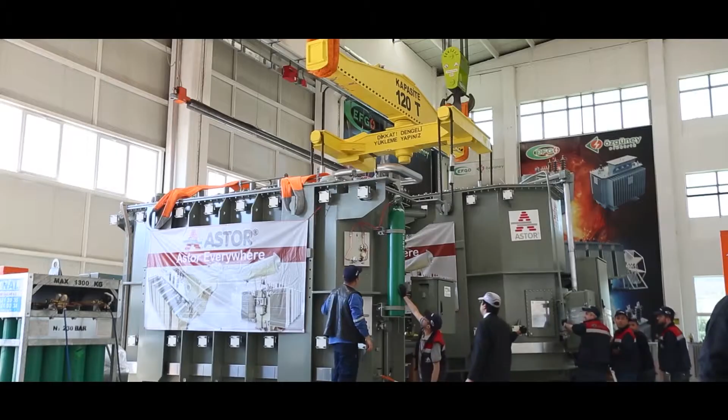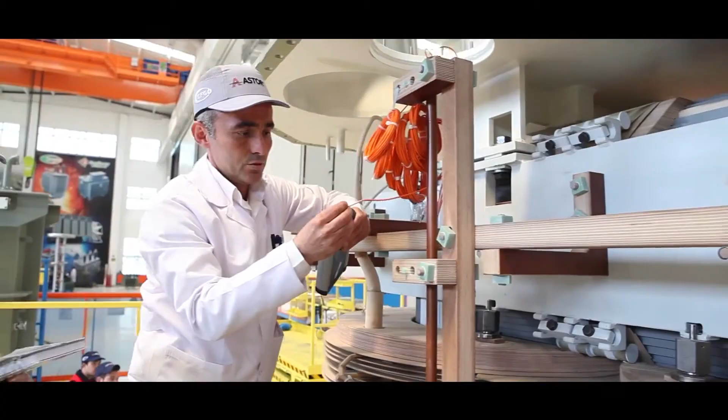The company manufactures cast resin dry-type and oil-type distribution transformers, as well as power transformers up to 220 kilovolts, 150 megavolt ampere at its factory. This facility boasts a closed area of 26,000 square meters, established on a 36,000 square meter surface at the Ankara-Sincan First Organized Industrial Zone. Our customer satisfaction-oriented company takes quality as our primary target for both manufacturing and service.

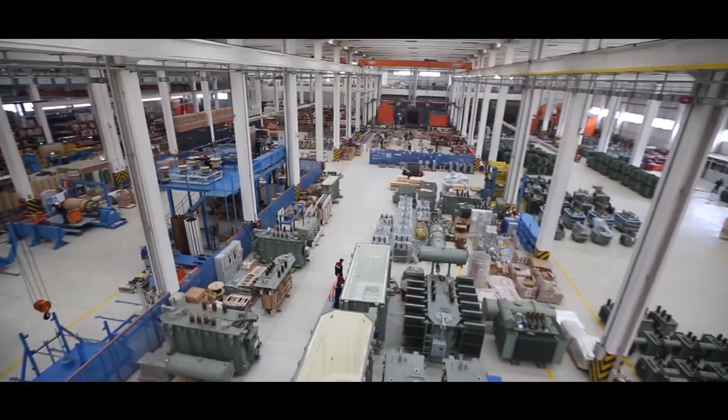All of the manufacturing processes in accordance with the aforementioned target are meticulously checked at every turn by our experienced and competent quality control staff. Our company is in possession of many management systems such as TS EN ISO 9001, TS EN ISO 14001, TS EN ISO 17025, and OHSAS 18001. The completion of manufacturing is ensured in accordance with the related project and the quality management systems.

Related non-conformities are eliminated with the implementation of corrective and preventative actions. All processes are recorded and tracked. Kaizen studies are conducted for the processes that require one by analyzing its accumulated data. Astor AG, with a monthly production capacity of 2,000 distribution transformers, boasts Turkey's largest capacity and ranks within the top 5 companies of the world in its field.

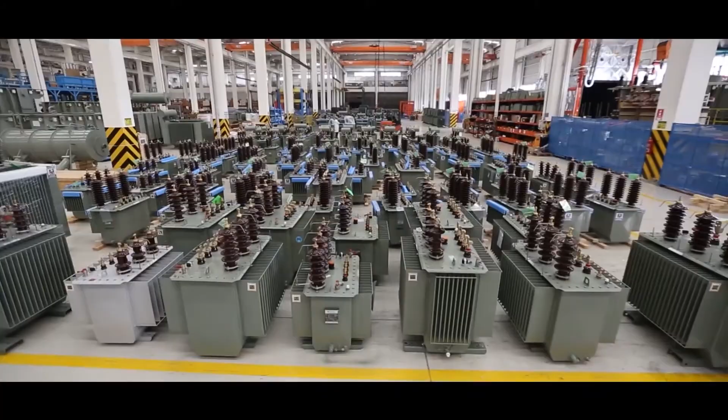At our facilities, we manufacture cost-efficient, safe, low-loss, long-lasting oil-type transformers with a power range of 250 to 2,500 kilovolt ampere and up to 36 kilovolt voltage levels, as well as custom-type transformers per customer demand, bearing the brand of Astor and EFG. Power transformers up to 220 kilovolts and 150 megavolt ampere, bearing the brand of Astor.

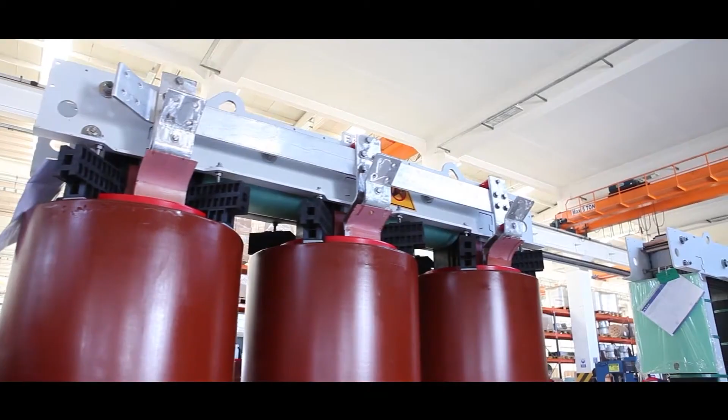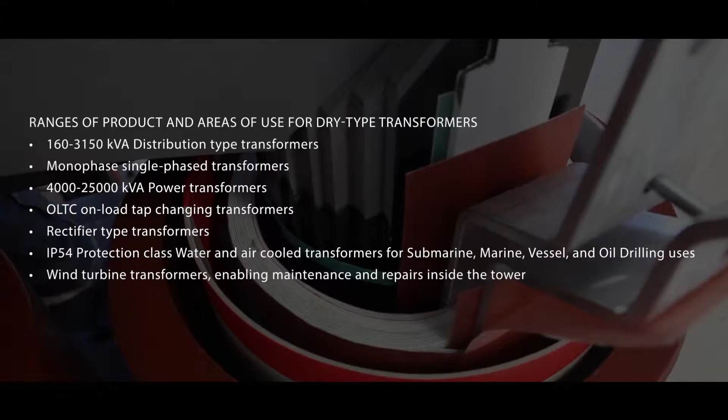Cast resin dry-type distribution transformers at the quality standard of ISO 9001 with a power range of 160 to 3,150 kilovolt ampere, up to 36 kilovolt voltage levels with natural air-cooled or fan-cooled options, bearing the brand of EFG. Ranges of product and areas of use for dry-type transformers are given below: 160 to 3,150 kilovolt ampere distribution-type transformers, monophase transformers, 4,000 to 25,000 kilovolt ampere power transformers, OLTC on-load tap-changing transformers, rectifier-type transformers, IP54 protection class, water and

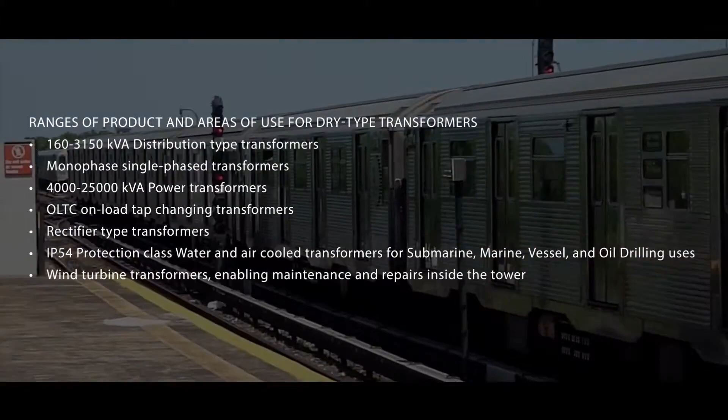air-cooled transformers for submarines, marine vessels and oil drilling uses, wind turbine transformers enabling maintenance and repair inside the tower. Minimizes the risk of burning and explosion at locations with a high density of human habitation, such as subways, tunnels, mines, airports, shopping malls, schools, hospitals and skyscrapers. May be manufactured with an internal or external type cell as optional in conformity with IP20, IP23, IP33 protection classes.

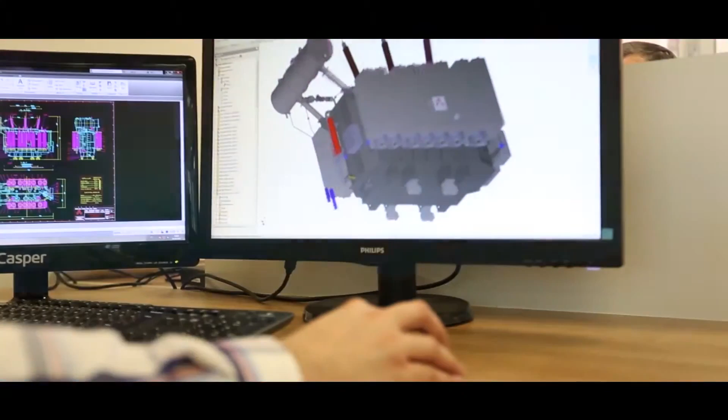Apart from the aforementioned, our overseas type test reports for the product series within the product range are constantly updated and have been certified by international accreditation testing organizations such as KEMA, IPH and CESI. The materials obtained in their raw form are converted to semi-finished product inside our facilities and are then turned into transformers by the skilled hands of our experts. The projects are prepared by our experienced design team under the leadership of over 30 engineers.

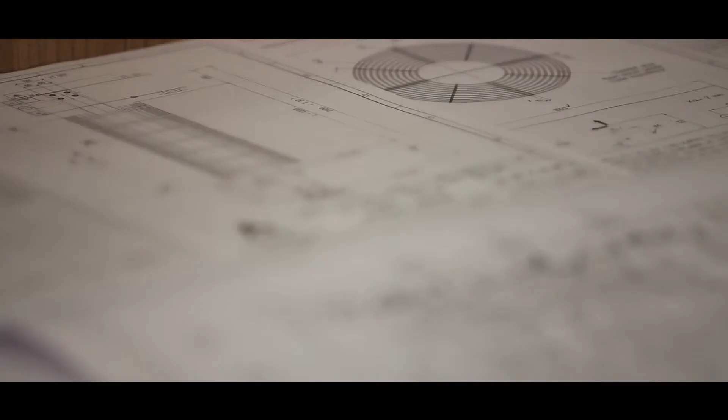We, as Astor Transformatör, are aware of the importance of R&D phases for our company and country. Therefore, a determined and firm step has been taken by our company to work with highly skilled personnel in order to own an up-to-date and comprehensive R&D center as of 2011. The duties of the R&D center of our company, which is passionate about always keeping track of world technologies, include

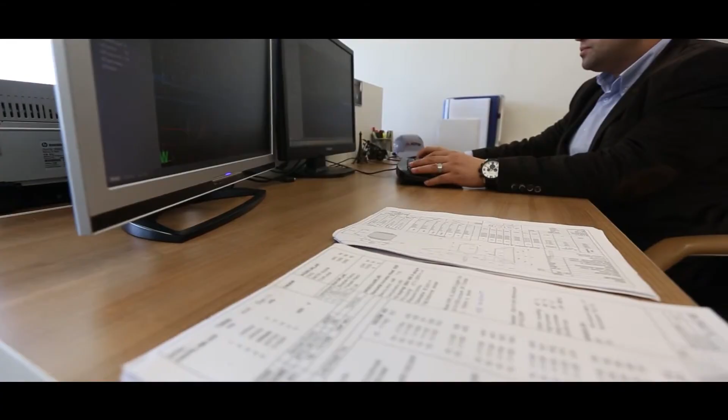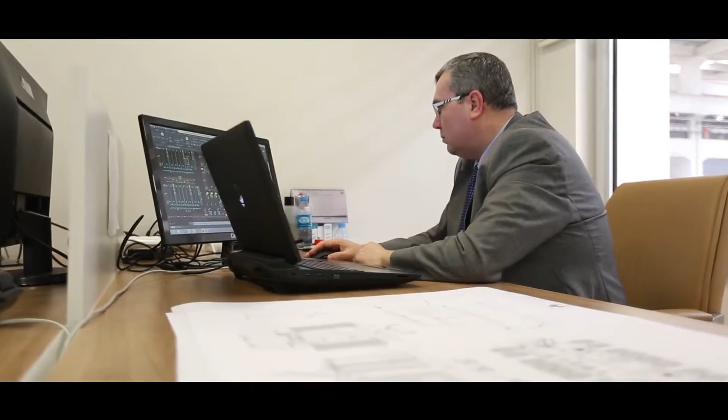increasing manufacturing efficiency and providing solutions for arising problems, developing the best and innovative designs in terms of functionality, performance, dependability, cost and manufacturability, supporting the design and manufacturing process with analysis and simulations, preparing and keeping track of R&D projects, as well as providing training support for manufacturing and design personnel regarding transformers.

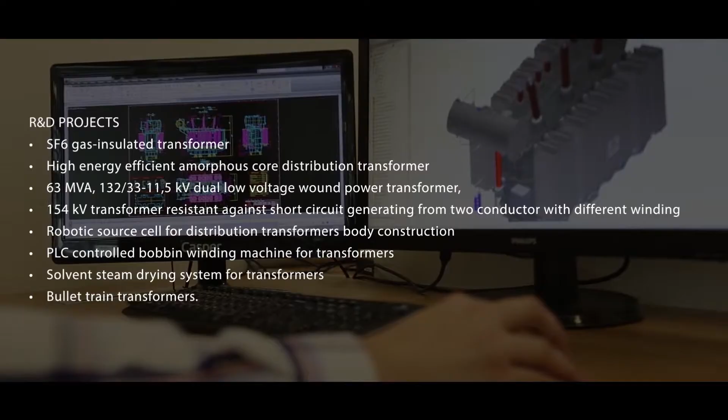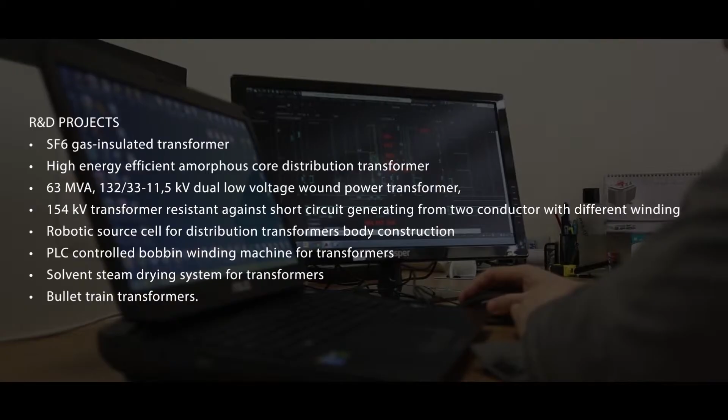Our R&D center has conducted and successfully completed many R&D projects in cooperation with TÜBİTAK. Some of these projects are given below. Design and prototype production of SF6 gas-insulated transformers. Design and prototype production of high-energy efficient amorphous core distribution transformers. Design and prototype production of 63 megavolt ampere, 132/33/11.5 kilovolt dual low voltage wound power transformers.

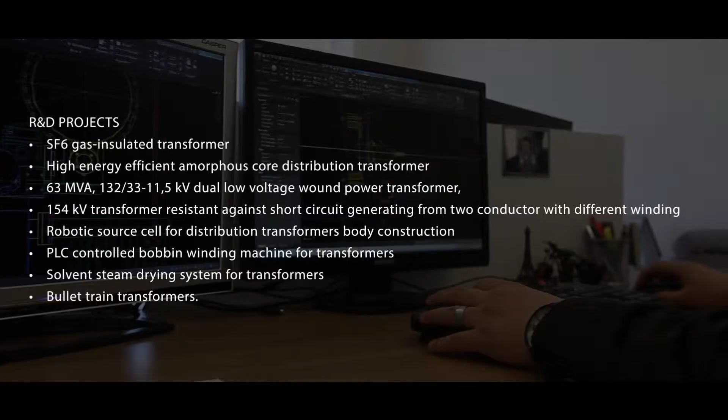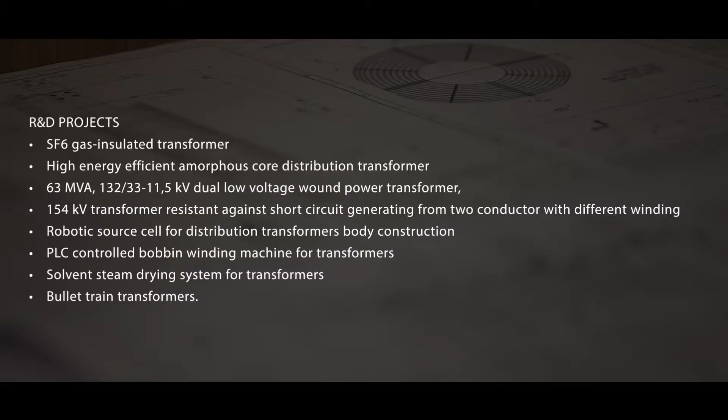Design and prototype production of 154 kilovolt transformers, resistance against short circuit generating from two conductors with different winding. Design, development and implementation of robotic welding cell for distribution transformers body construction. Design and prototype production of PLC-controlled bobbin winding machine for transformers. Development and prototype production of a solvent vapor drying system for transformers, as well as bullet train transformers.

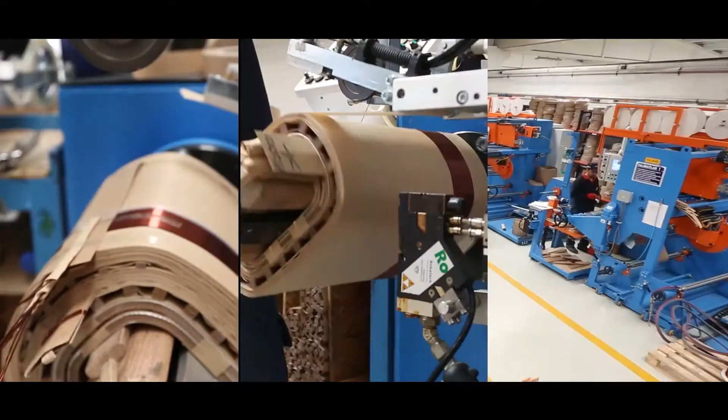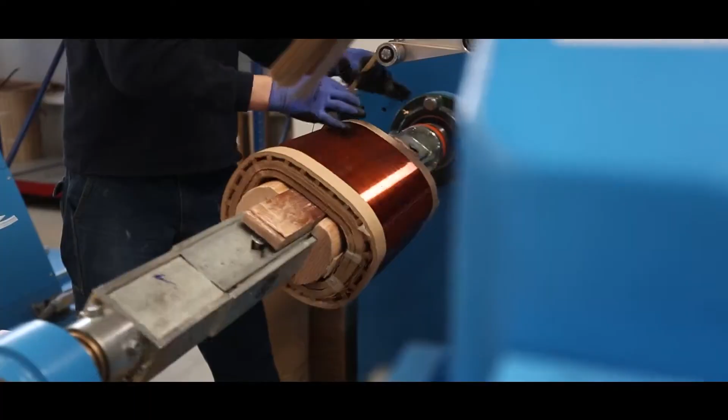Oil-type transformers. Enamel and paper-isolated round and flat electrolytic copper and aluminium conductors are utilized for conducting material in windings of distribution transformers. The used insulating material is water and voltage resistant. The normal distribution of voltage surges has been ensured and strain of windings has been prevented with the implementation of special winding in high voltage windings by means of increasing the bobbin inlet-outlet layer insulations.

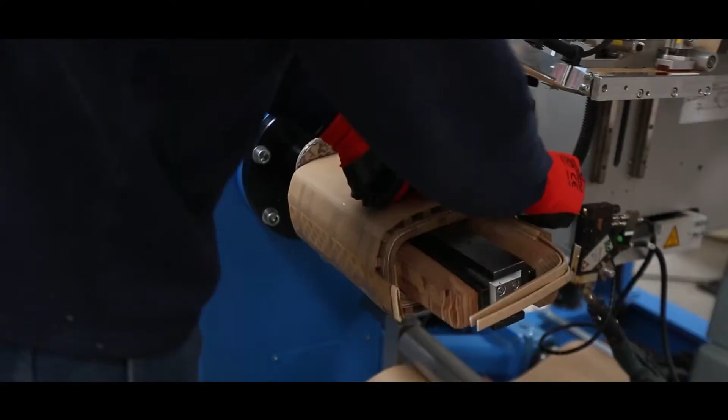The windings of power transformers are executed as overturned and layer winding depending upon design conditions. Vertical and horizontal pressed systematic bobbin machines are utilized for the purpose of ease of manufacture for layer windings and elimination of gaps on the contact surfaces of windings. Winding processes are carried out by CNC-controlled automatic machines.

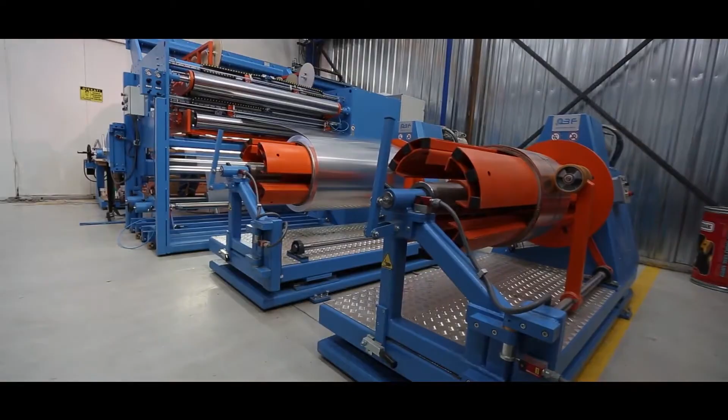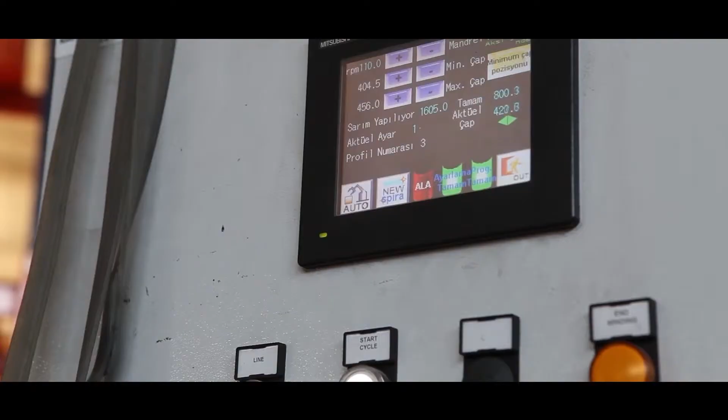Dry-type transformers. Tape winding technology, copper or aluminium tapes, are utilized for low voltage windings depending upon the project design due to their technical advantages. Radial short circuit forces are controlled through the utilization of special pre-resin impregnated material according to the desired isolation class between turns.

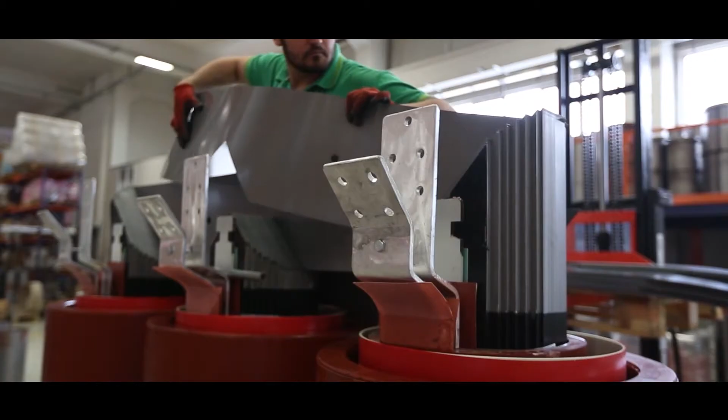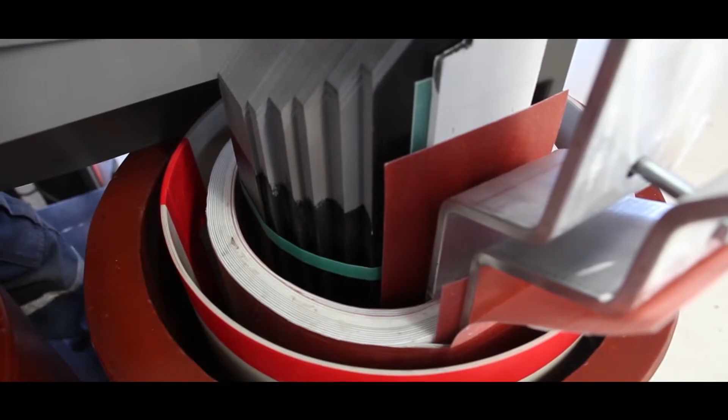Bobbins are provided resistance against difficult conditions and excellent dielectric features by being subjected to a hardening process following the winding process. High voltage bobbins are manufactured using copper and aluminium flat or round conductors with F or H class isolation depending on the project. Fine natural cooling is ensured within our designs by means of the effective dispersed cooling channels. Also, advantage is provided against high voltage surges.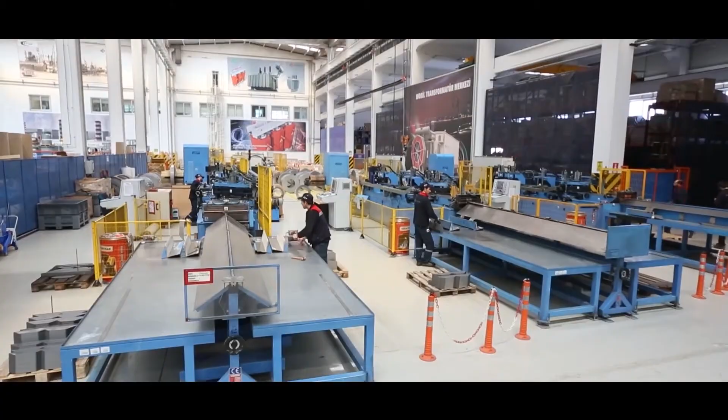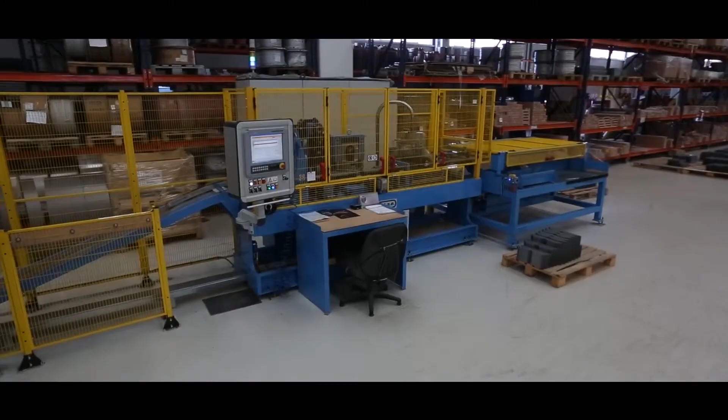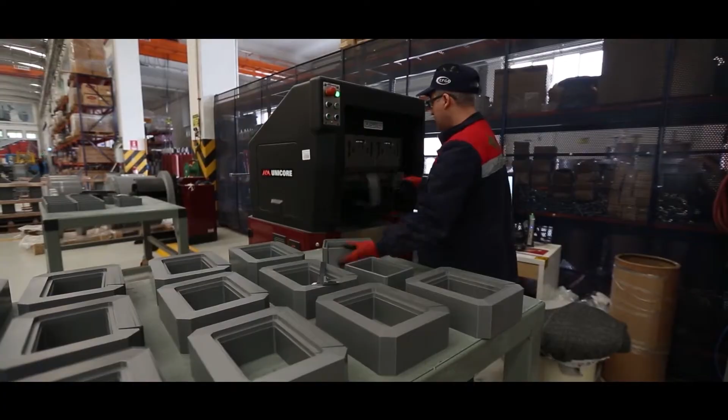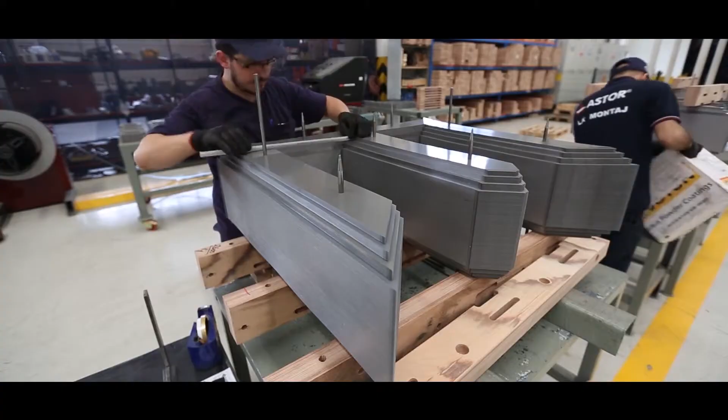The core is manufactured from M5, M4 silicon alloy sheets with oriented crystals and a thickness of 0.30, 0.27 and 0.23 millimeters. Sheets have a 45 degree slanted cut at the transition regions of the magnetic circuit. The production of the core is performed according to the project by cutting all of the sheets utilized within the magnetic circuit with CNC-controlled cutting machines. The cutting and alignment of the magnetic circuit is performed with a method called step lap, which is useful for minimizing the iron loss. The nucleus is aligned with cross and longitudinal step lap implementation.

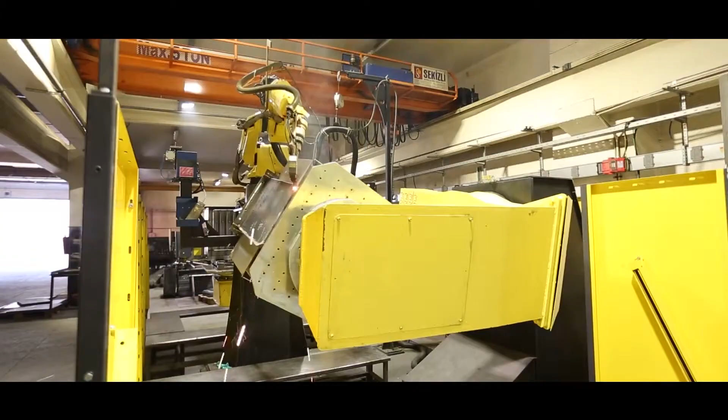CNC-controlled plasma and wave wall machines are utilized for the production of the boiler. The welding operations of boilers are performed with CNC-controlled robots. CNC-controlled plasma machines are utilized for the production and cutting operations of transformer caps, and welding operations of the caps are performed with CNC-controlled robots. We are able to manufacture products with standard quality by minimizing human error through the use of CNC-controlled robots.

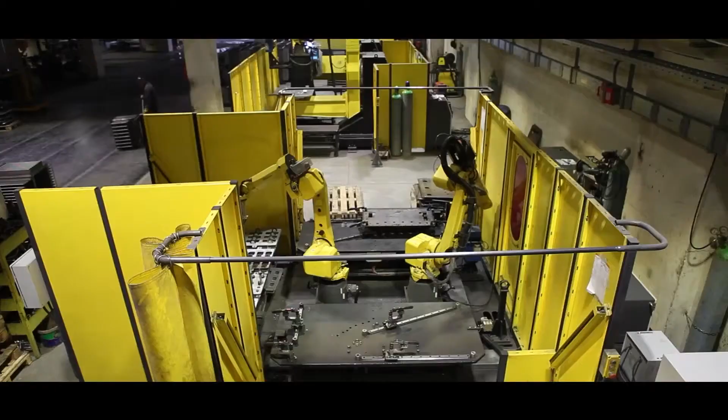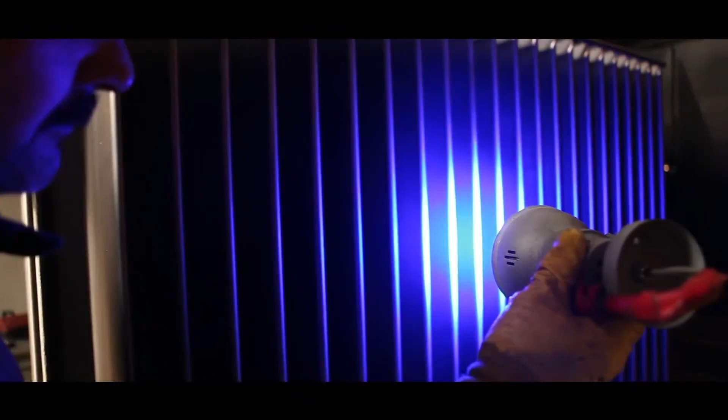Boilers whose mounting and welding operations are completed are put through a tightness test under compression. The suction resistance of wave-walled boilers is designed as 0.65 bar and of radiator boilers as 1 bar. The manufactured boilers are subjected to sandblasting operations if requested by the customer. The dyeing process is completed in accordance with the related standards. The boiler cap is designed for the extraction of winding ends.

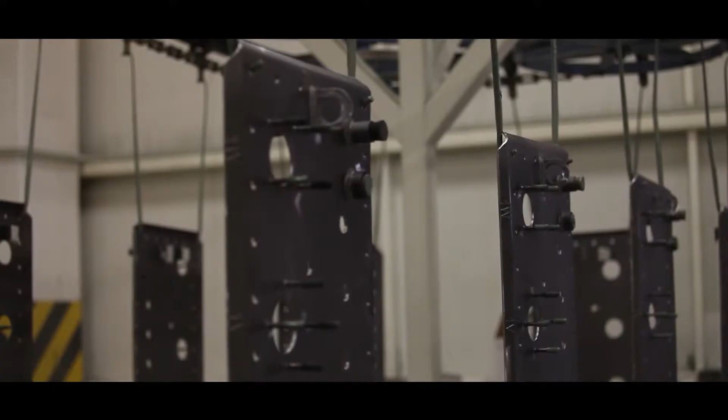The parts are sandblasted following the leak checks, and the tank is prepared for the dyeing process by means of chemical showers. These are prepared for use by first lining with an automatic conveyor system and afterwards a top layer of electrostatic powder coating. The products with the highest quality, completely homogeneous and of desired dye thickness are meticulously put through quality control.

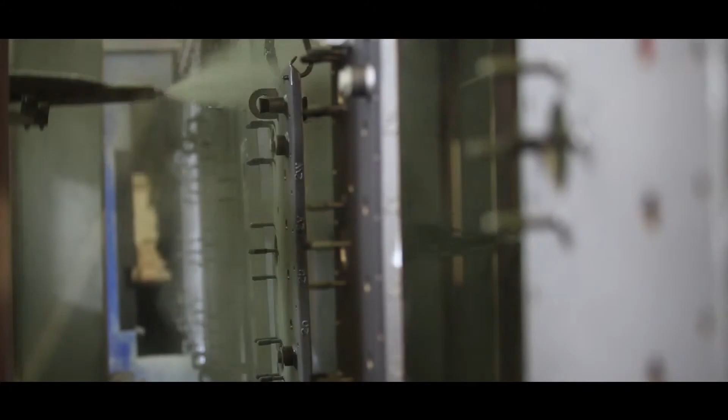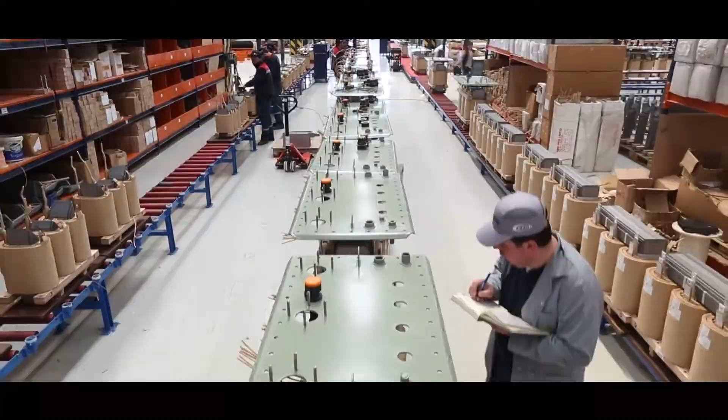Primarily, the bobbins are carefully placed on the nuclei in order to form the mobile part, and afterwards the laths are mounted to compress the core and nucleus for the purpose of stabilization and conveyance of radial forces. Then the upper nucleus is aligned and yokes are tightened. Thus, the possibility of movement of the transformer on the load is eliminated by increasing the pressure surfaces.

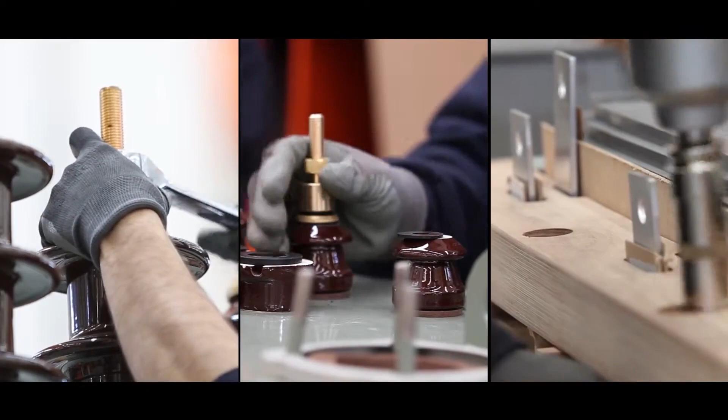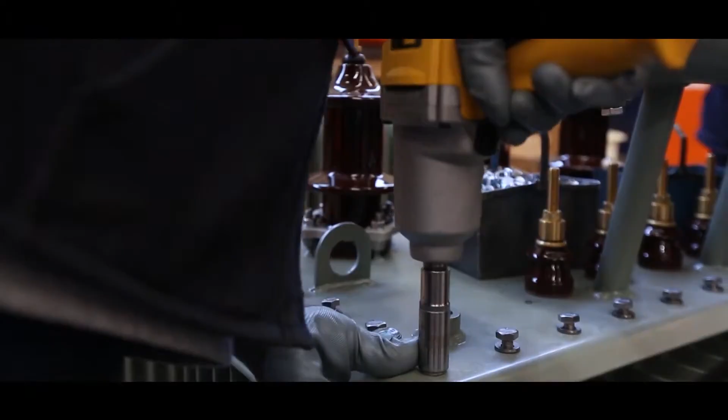The cap is mounted on the mobile part, and the connections of commutator and gauge ends are made with silver electrodes. Later on, AG and YG isolator mounting on the cap is completed with special gaskets, paying maximum attention to oil leakage. With this process, the mobile part is prepared for firing.

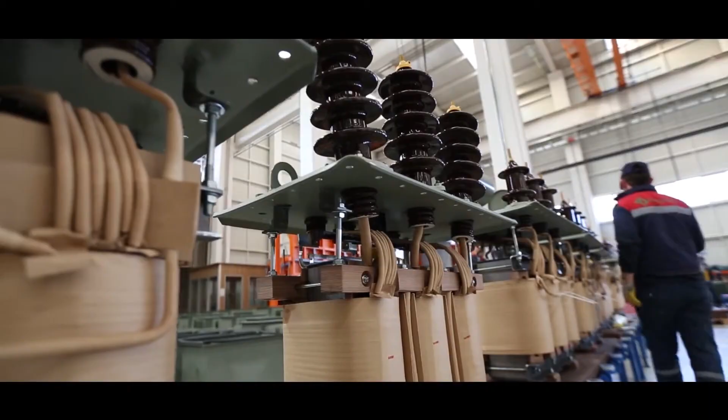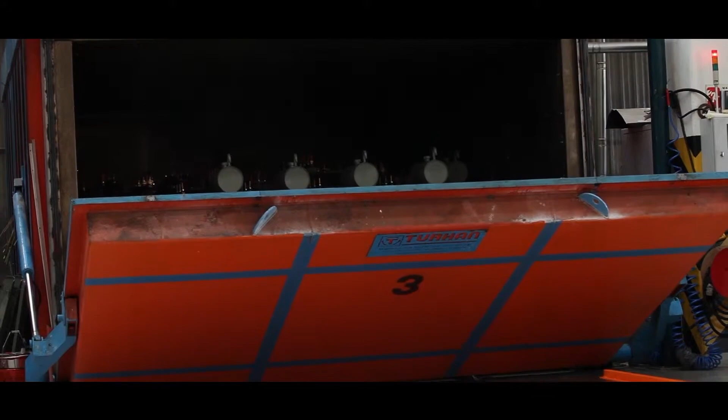Heating and suction is applied with our drying ovens at the determined temperature in order to dehumidify the solid insulating materials of the mobile part. Thus, the maximum drying process is performed. The humidity and temperature values in our ovens are constantly analyzed and evaluated via the charts on the digital screens. After removing the mobile part from our drying ovens, it is placed within the boiler at the temperature of 20 degrees Celsius within 15 minutes at most.

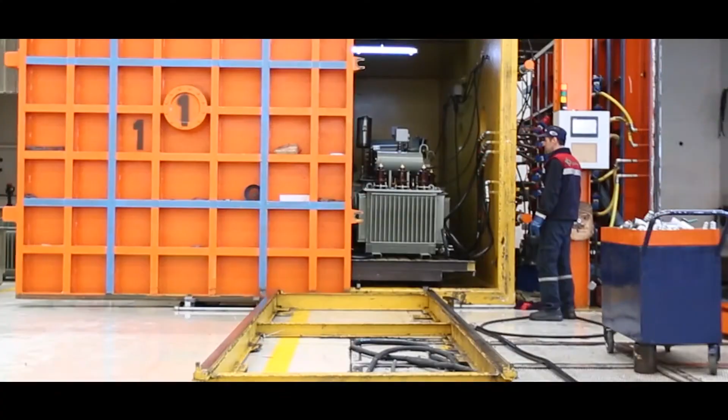Oil filling is performed in a suction environment at predetermined temperatures within the oil-filled suction ovens. Finally, the mounting process is completed by attaching accessories such as the indicator valve, throttle, thermometer, etc. on the oil-filled transformer and submitting it to the testing division.

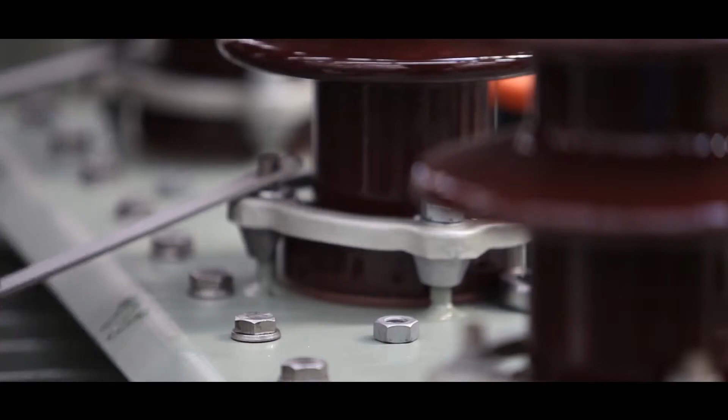Each of our manufactured transformers is subjected to routine tests at IEC 60076 TS267 standards at our laboratories, which have been accredited with AB 0650T accreditation number on 12/06/2013 by the Turkish Accreditation Agency within our facilities.

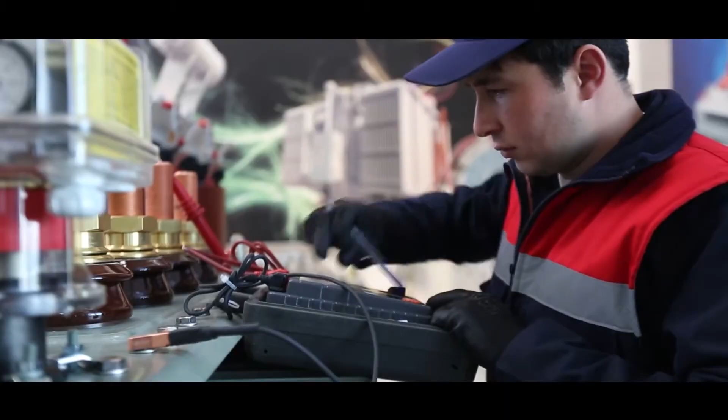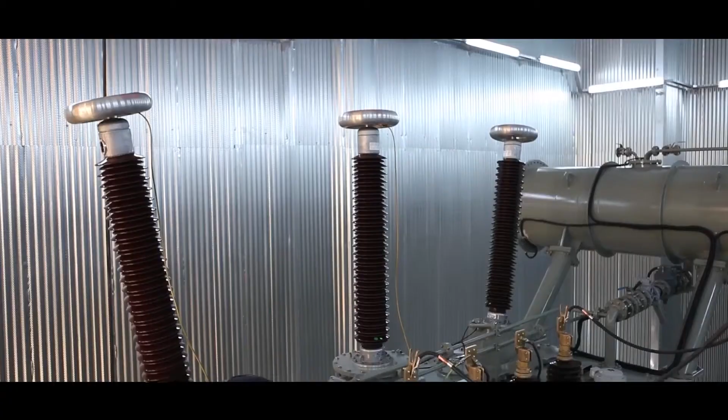All the tests demanded by the International Electrotechnical Commission and Turkish Standards Institute, except mechanical resistance against short circuits, for oil-type distribution transformers, dry-type distribution transformers and power transformers, are performed at our test laboratories. Our systems comprise the testing field of transformers with 150 megavolt ampere power and highest operation voltage up to 220 kilovolts, and transformers with 30 megavolt ampere and highest operation voltage up to 36 kilovolts.

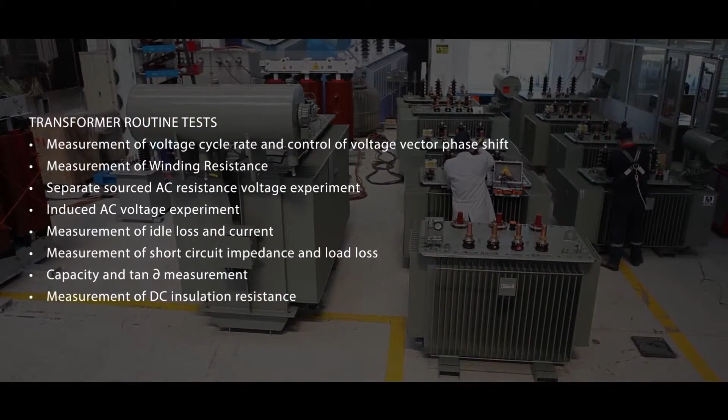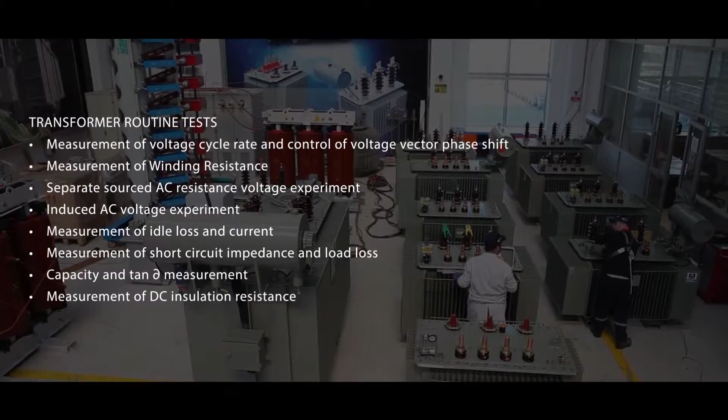Transformer routine tests. The following tests are routinely applied to every transformer manufactured at our facilities. Measurement of voltage cycle rate and control of voltage vector phase shift. Measurement of winding resistance. Separate sourced AC resistance voltage experiment. Induced AC voltage experiment. Measurement of idle loss and current. Measurement of short circuit impedance and load loss. Capacity and tan ∂ measurement. Measurement of DC insulation resistance.

Transformer type tests. The following tests are also applied to the same type transformers if requested by our customers. Sound level measurement, lightning impact experiment, temperature rise experiment, fan or liquid pump loss measurement if a fan cooling or liquid pump system exists.

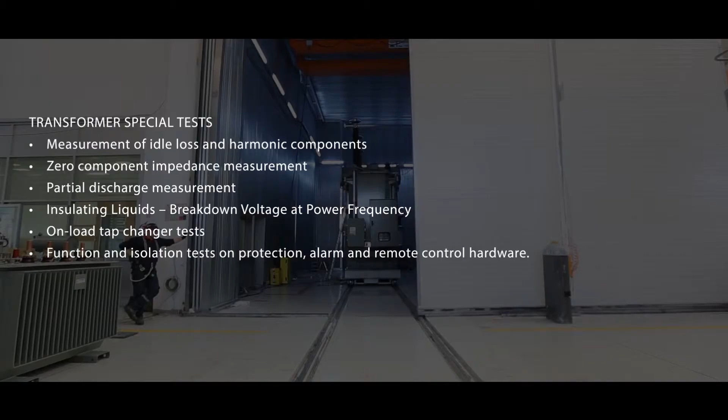Transformer special tests. Apart from the services mentioned, the following tasks can also be performed if requested by our customers. Measurement of idle loss and harmonic components. Zero component impedance measurement. Partial discharge measurement. Insulating liquids. Breakdown voltage at power frequency. On-load tap changer tests. Function and isolation tests on protection, alarm, and remote control hardware.

The transformers, whose manufacturing and test processes have all been completed, are taken to the final mounting division. After the successful completion of the final controls, they are labeled and subjected to the packaging process, ready to be shipped.

Our customer service department meticulously examines customer feedback, prioritizing customer satisfaction. The planning of our customer service unit is completed to ensure 24/7 service availability. Our company, providing service to the electrical infrastructure of over 50 countries by virtue of our product and service quality, rightfully takes pride in the awards received for exportation. Germarel Power.